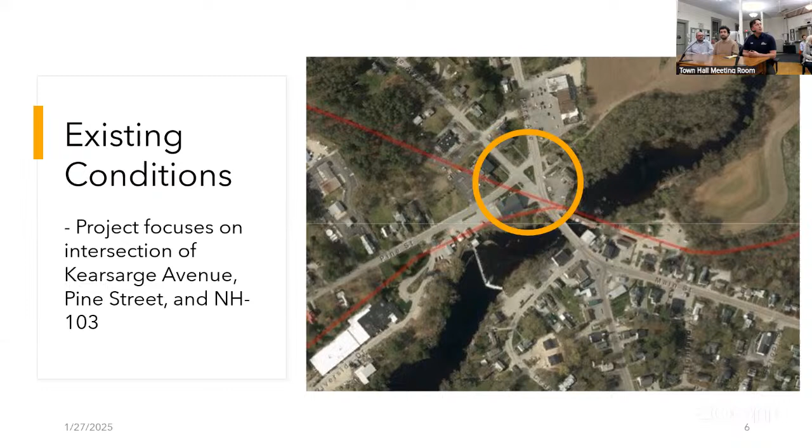So this is an existing intersection. Contoocook is one of the economic and community centers of the town of Hopkinton, so this is a very busy intersection, as you can imagine. It's a key access point for a lot of residences, the fairgrounds, schools, local businesses, and of course the firehouse is directly adjacent to the intersection. Additionally, the covered railroad bridge adjacent to this intersection is one of the oldest, I think the oldest remaining railroad bridge in the US, so that's a point of focus for us in this project.

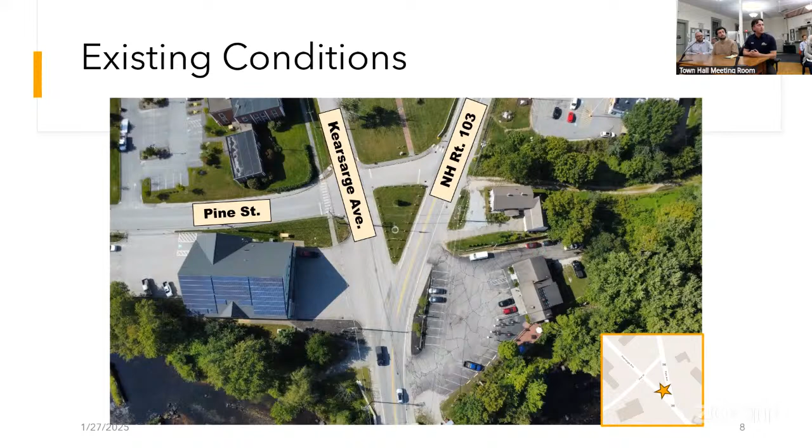Here's an overhead aerial view of the project location, showing the three intersecting streets, with a little guide in the bottom right showing about where you're looking down the intersection. Here's one view, and here's another street level view.

Now, to expand on that a little bit, we want a comprehensive design that includes an intersection, a landscaped sidewalk network, and a focal point right in the middle of the intersection to keep that community feel. We want to improve upon the existing green space. Obviously, cost and schedule are a factor, as with any municipal project. And the main question we kept coming back to is, what is the best type of intersection for this layout?

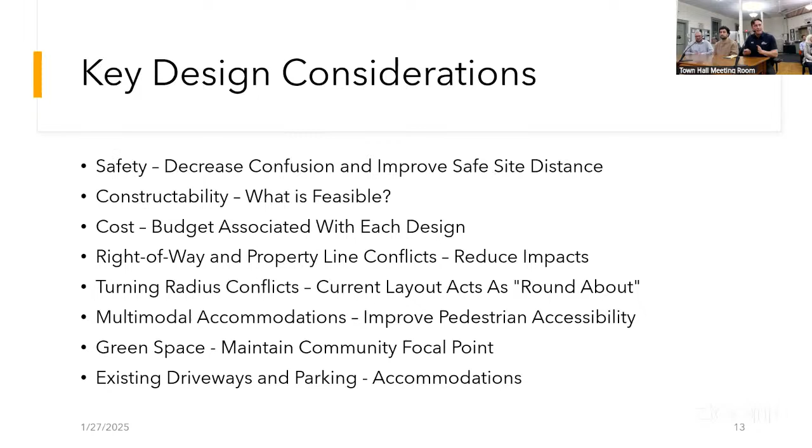Again, expanding on some of the main points, we've focused on safety, constructability, cost, green space, things like that. These are the bullet points that really help us evaluate the various intersection options we looked into and guide us through the design process.

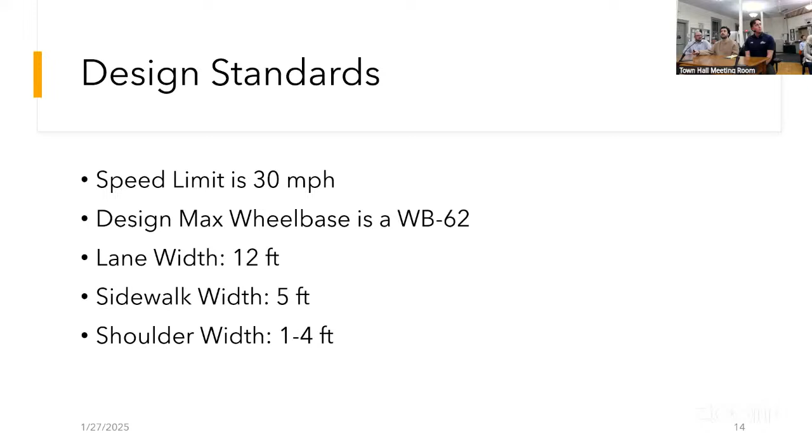Once we had all those considerations, we came up with standards that we wanted to use throughout all our different designs to keep that consistency. We decided we wanted to keep the speed limit 30 miles per hour, the current speed limit through there now. We wanted to make sure it was accommodating to all WB62 vehicles, including fire trucks from the nearby fire station or school buses from the nearby school. We also decided on a lane width of 12 feet, a sidewalk width of 5 feet, and a shoulder width of 1 to 4 feet, depending on if there's a curb or not.

Then we had to come up with the options we wanted to use. We first asked ourselves what the issues were with the existing configuration, what needs to be solved. Then we decided on our options: a stop-yield, which is the existing one there now, was our first option. Then a traffic light controlled option, which didn't make it past the conceptual design phase since it wasn't really practical and wasn't warranted. And then we decided to do a roundabout.

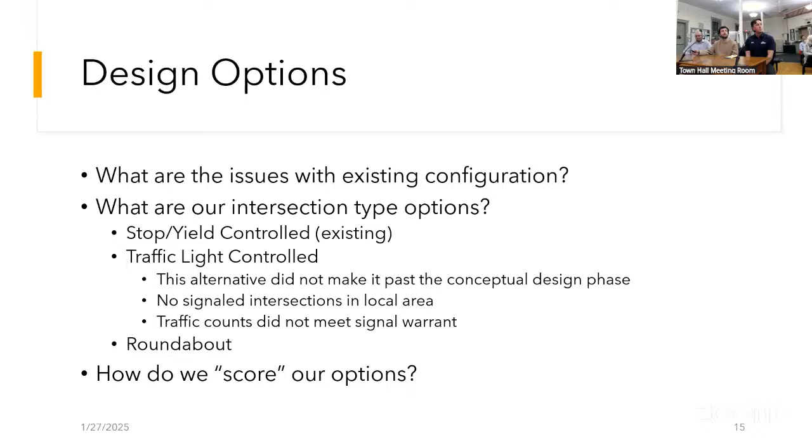Once we had all our options, we wanted to score them. So we came up with a decision matrix for all of our different alignments. The first thing we needed was a baseline, so we used the existing conditions at the time, how the intersection functions currently, as our baseline.

What we found interesting was that both roundabouts we developed, which we'll go through in the next slides, scored very well — significantly better than existing and the two realignment options we came up with. That was a key tell very early on for us in this process.

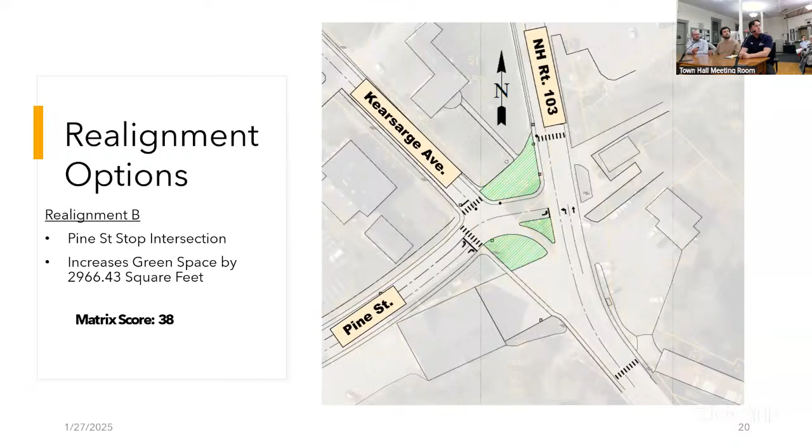If I can interrupt for a second, inscribed diameter is curb to curb across the intersection, and in roundabout design the diameter controls a lot of factors. It's a controlling factor, so through the different designs we considered a variety of different inscribed diameters. That's the main toggle we could play with.

We really just narrowed it down to these two. For this roundabout, there were some advantages and disadvantages. Some advantages of turning into a roundabout are it improves overall safety of this intersection, allows for constant traffic flow throughout, and increases that center island green space from about 2,800 square feet to about 5,000.

Some of the disadvantages were that this has a high initial cost, it cuts into some of the abutter properties, and there is some difficulty for the fire station to head north or west.

For option B roundabout, this one had an inscribed diameter of 130, so 10 feet less, and scored 1 point higher on our matrix score, which was the highest.

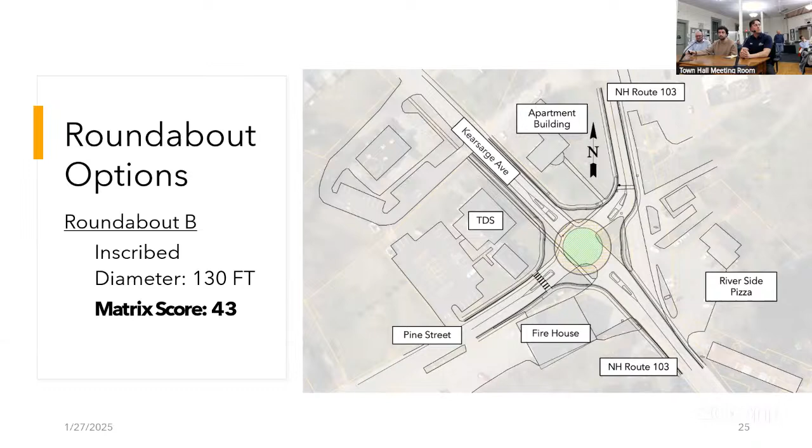Some of the differences for this roundabout are that there's a smaller green space of about 3,200 or 3,400, and it's less intrusive as it cuts less into the abutter properties. It improves the safety of the roundabout and allows for that constant steady flow also.

And some of the disadvantages are the high initial costs, fire truck exit, and it's really in a difficult location.

So using our matrix, as we presented before, we found that our roundabout B option scored the best, by only a point, but still our best. With that information in mind, we have decided to carry through a design with a kind of hybrid of the two roundabout options, using some of the better features of both.

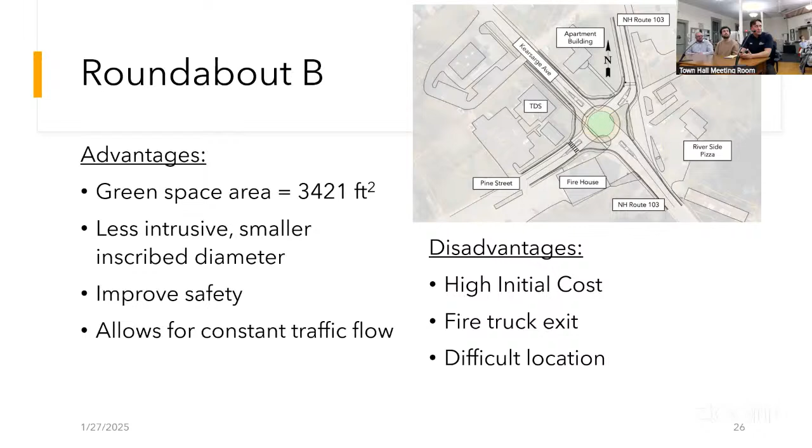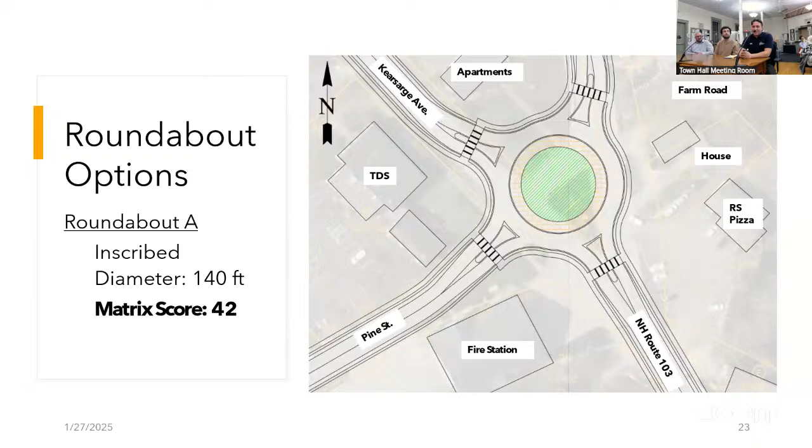The key thing that Cole touched on with the roundabouts is that we have to prioritize direct access into the circle from both the fire station and from the existing farm road and residence just north of Riverside Pizza. That has been an issue that has come up in every design we've played with and developed. Ultimately, it will have direct access for both the fire station and the farm road. Where or what that looks like is to be determined, but that's part of our work for this upcoming semester.

So the future work and some of the deliverables we're going to produce — I included a screenshot of our design report that we submitted at the end of last semester, going over all the work we've done. I think it ended up being 40-something pages with some very nice graphics that we produced for our class.

We're going to carry through a complete design of the roundabout option for the intersection, and produce a final design report, expanding on our preliminary design report. This includes a full cost estimate for construction of the intersection, a construction schedule, a traffic control plan, and a drainage plan for the stormwater network that will serve the intersection.

Any questions? I'm sure there's a lot of information to absorb.

Certainly, one of the roads is a state road. Yes.

Have you talked to the state, bounced your ideas off them? Not yet. A lot of these preliminary designs were more for research, to guide ourselves for this semester. This spring semester is when a lot of that design work actually happens. A lot of what we did in the fall was just research. We did a site visit with Chuck and Anna early on. Our faculty advisor, Professor Punton, actually works for the DOT part-time, so a lot of that information is going to be worked out with him because he's our best contact for that. You've done a great job so far. Thank you.

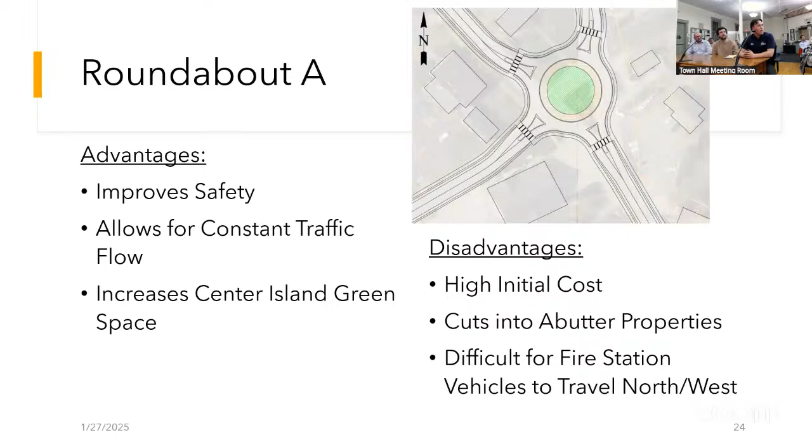Can you go to the recommendation slide again? Okay, A's location with B's inscribed diameter. Can you talk a little more about what that would be? So as you can see on this slide, you can kind of see where the center of the roundabout is for A, and for B it's shifted a little bit to the southwest. We liked the location for A, kind of closer to the apartments and TDS compared to roundabout option B, because it gives more room for the fire station to get into the roundabout without it taking any extra time.

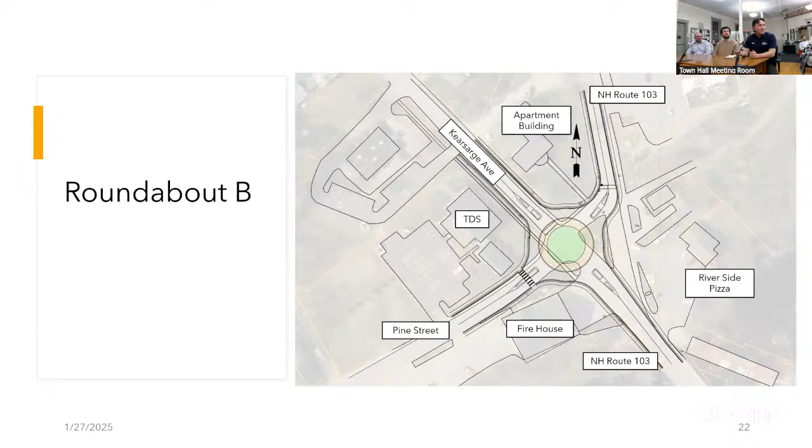The other design consideration for roundabouts is what's called the fastest path. You don't want someone to be able to drive directly through the circle and bypass the yield condition that exists there. As you can see, we've twisted the entrances and exits into and out of the roundabout to force drivers to slow down and respect the circle, not just buzz through at 50 miles an hour. However, you can go too far with that, and on the northeast corner of this intersection it's a bit severe, making it difficult for a tractor trailer or larger vehicle to negotiate that turn. So we decided this sized roundabout in this location gives us the most freedom and easiest access for vehicles through the intersection.

And when you say size, you mean that diameter? That inscribed diameter directly across the circle governs a lot of the design choices. If you do the smaller diameter but in the A location, are we going to encroach into abutting private property at all, or has the smaller size avoided that? That's the positive about the smaller size — it reduces the impact on the apartment building to the north side, TDS on the left-hand corner. By shrinking that circle by another 10 feet, it's more compact and reduces the impact on those properties.

But is there still some encroachment? Yes. Okay. Just to echo Ken's point, this is super impressive, and we really appreciate you guys doing all this work. Thank you. Thank you.

How did you find this spot? At the start of the semester for our capstone class, we were presented with, I think, 30 different projects — bridges, environmental science projects, all different types. We ended up choosing this one randomly, came together as a team, and kind of ran with it. It's been very fun, very rewarding so far. Nice work — did each of you individually select this project? Got it, okay, yes, nice. Any more questions? No, this is really cool. Thank you so much, I'm excited to see how it moves forward.

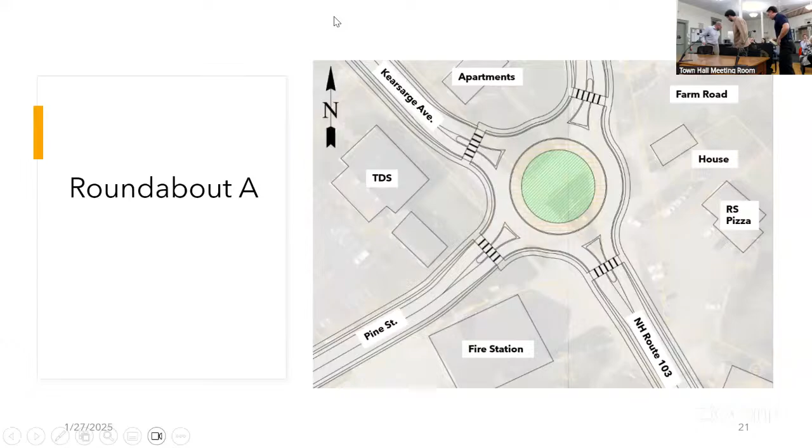Hi, we're ahead of schedule. Are we good for our next public appointment? I don't know who's here for the Main Street, South Hop, Old Henniker intersection.

I know Craig's here, you want to go? Yeah, I don't know if anyone else is coming. I think all of us here were involved in that. Our engineer is coming, probably looking at the agenda. We have some questions for him, but we're done.

If you're good to start, we can. I didn't know if I was presenting or not, I'm not sure how much background information you have, but I'm happy to walk through it. Yeah, I'll sit here. This has been the most involved, for the longest. To be clear, this is Jeff's idea. Sounds right.

This is a continuation of the work done for the traffic calming trial at the intersection here, but really it's a continuation of about three decades worth of planning by the DOT and Hopkinton Village. After the trial period, we had the survey, we had responses, and then the precinct also had a meeting and a vote at their town meeting or annual meeting. Then nothing happened because so much work would have to happen with the DOT, and the response from DOT has been supportive, but it comes back to the funding question of how, who, and how much.

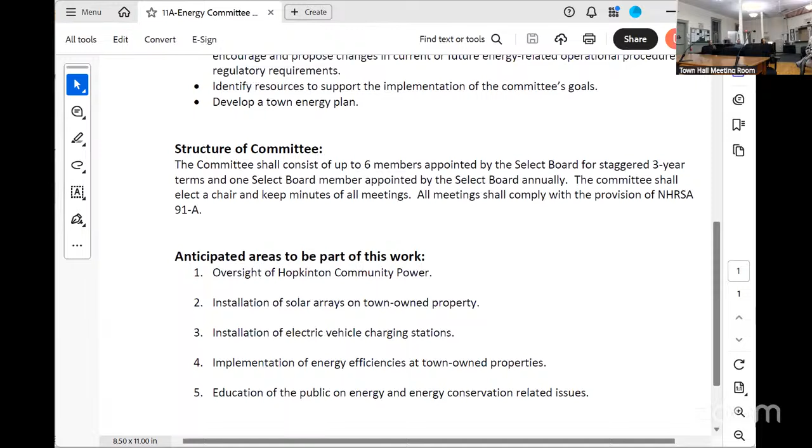I'm certainly happy with those two, Neil. The number of members, you reduced it from 7 to 6. I think my preference is to keep it at 7, as well as a select board member. Is it 6 plus 1? It originally was, and then there were some extra people, so it went up to 7. Generally, you try to keep an odd number on the committee. That was the only thing behind that.

The committee lately has been having 100% attendance, so the quorum issue didn't seem to be relevant. And just speaking for myself, I would like to stay on the committee. There are 6 people on the committee now that would like to stay, so I'd like to keep it at 7, so there isn't an issue there. It'll just be the democratic process to break any ties, if necessary.

Does the electric aggregation committee have any specific language tie-ins to the actual community power agreement? Like, does this give them the ability to actually do the rate setting, or is that not the case? You voted Mark and Ken as representatives to the coalition, so that's the input that goes to them. The coalition is what sets the rates.